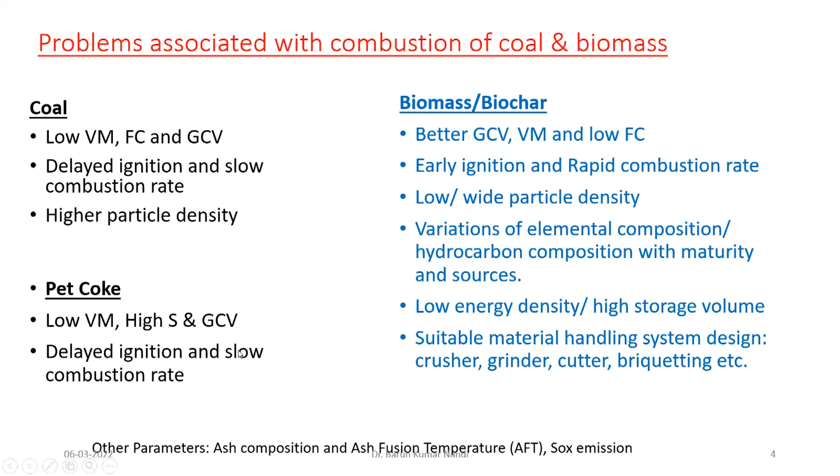So these are three typically different fuels we can blend with coal. Now during blending, we have to consider their different properties. Some of the properties of this fuel are additive in nature - that's like you can add them. It's like fuel A having one GCV, fuel B having a different GCV. By simple calculation, we can estimate their average GCV, average ash, moisture, VM, etc.

So these are the properties we call additive properties. Considering this aspect, we can blend any fuel if we want to only increase the GCV, VM, moisture, etc. So here any blend ratio is accepted for any power plant.

But there are some non-additive properties, where you cannot simply add A plus B. So here you have to see if their individual properties are matching or not. Like ash fusion temperature - if any coal has ash fusion temperature of 1000 degrees, and another coal has ash fusion temperature of 1500 degrees, if we blend them, obviously coal A will fuse first, then coal B will fuse. So here blending will not help. These properties are non-additive.

Similarly, combustion characteristics and burning profiles are also non-additive properties. We cannot simply blindly add them. We have to experimentally verify the combustion characteristics of the blend and individual properties like HGI values, grinding index, abrasion index, ash fusion temperature, caking or non-caking characteristics, etc. We have to ensure individual non-additive properties satisfy the design parameters of any boiler. So here all blends are not permitted, because some properties may match and some may not match.

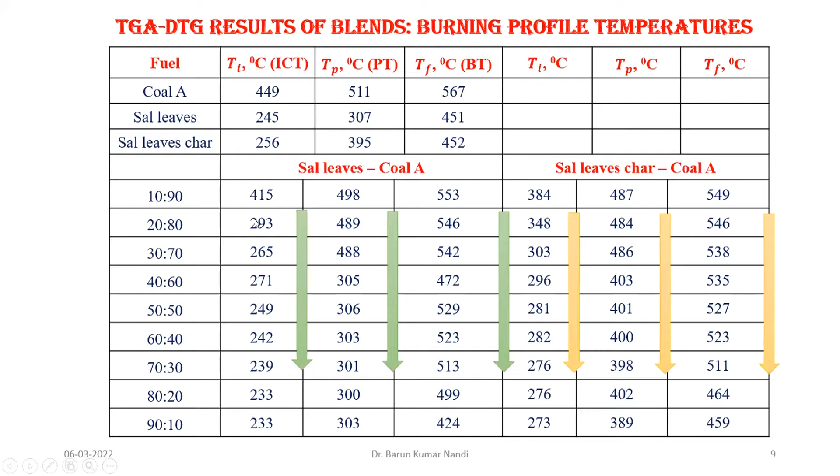So if we see the temperature, ideally if it is designed for coal A, 449. So that blend of 10:90, that is 10% biomass 90% coal, having 415 - so this we can see is nearby, we can use it to some extent. But if you see the other ratios, they are not permissible in the same boiler, because the difference is significantly higher.

So in this way, if we go for other types of agricultural waste - rice straw, wheat straw, mustard husk, wheat husk - they have a GCV in the range of 4,000 to 5,000. And here you have an option for petroleum coke, which we found through our research may be blended with coal in very small quantity because it has an extremely higher GCV.

But the problem is that pet coke has very less ash, but it may have a higher sulfur content. So we can see they have individually distinct combustion profiles - that is the TGA profile also. So in the blend also we can see how they are varying.

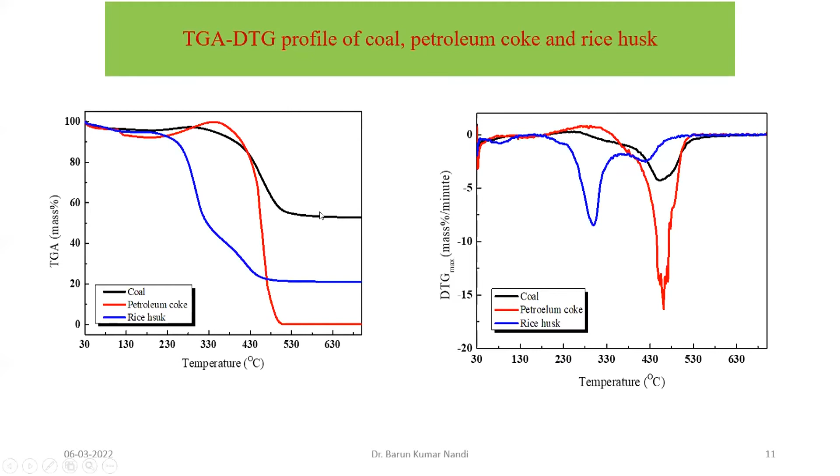So what we suggest is that we can blend a limited quantity of pet coke and biomass, maybe 5%, 10% in this range, by matching this burning profile temperature of 384 with nearby values like 356. So if we go for less pollution, we can make it 90:5:5 or like 92:3:5 in this ratio, so that these temperatures are very much similar.

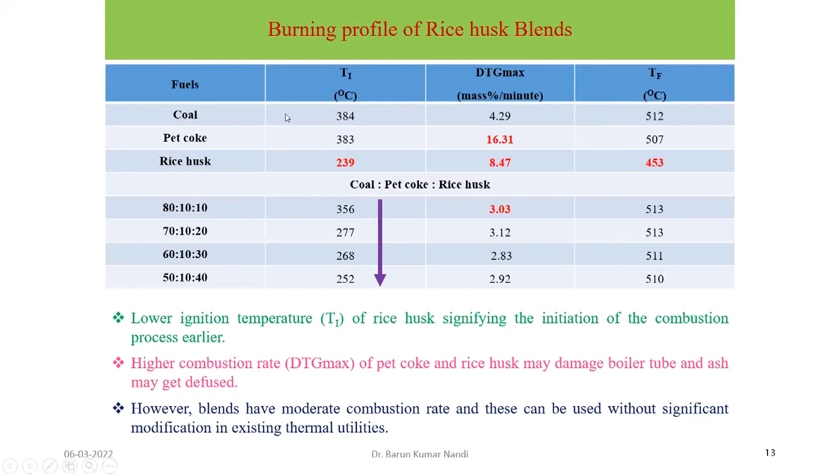So as concluding remarks, coal with similar burning profiles is expected to behave similarly in a full-scale boiler. Burning of high ash, low VM coal is very time consuming because it has an ignition problem. By comparing the burning profile parameters, we can identify which coal-biomass blend ratio or coal-biomass-pet coke ratio can be matched with the design coal. So compatibility may be judged, and the optimum blend ratio needs to be determined and maintained during blending, based mostly on non-additive properties like ash fusion temperature, burning profile, etc.

In the Indian context, biomass has higher GCV, above 4,000 to 5,000 kilocalorie per kg, compared to the high ash coal typically present at power plants now. Maximum 10 to 15% biomass may be blended or co-fired with coal. Biomass helps the combustion performance of high ash coal, particularly helping to reduce auxiliary liquid fuel consumption, that is the fuel oil we burn in a power plant. That fuel oil consumption can be reduced by blending some quantity of biomass.

Typically, forest leaves are more matured, so they have higher GCV compared to agricultural biomass. And if we blend biochar, it gives much more stable combustion because it has lower volatile matter. Very small quantities of pet coke may be blended because it has issues with sulfur content -- we can use a small quantity just to adjust the GCV or energy content of that blend.

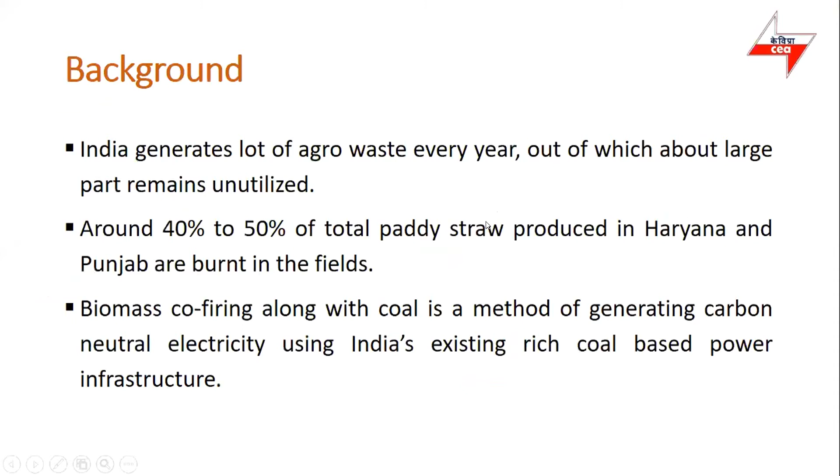Thank you sir. Respected all dignitaries, hope I am audible. Yes, you're audible sir. Okay, so just let me share my presentation. It's all yours. Okay, presentation is visible I think. Hello. Slide is visible, okay.

So the topic of my presentation is policy on biomass utilization for power generation through co-firing in coal-based power plants, just issued by our Ministry of Power.

We see in northwest India only, just 30 to 40 million tons of crop waste from paddy fields is burned after the harvesting season, during winter months of November and December. This 30 to 40 million tons, which is around 40 to 50% of total paddy straw, is in Haryana and Punjab, these northwest states only. This has the potential of around 6,000 to 8,000 megawatts and 45,000 million units of electricity annually, which we can generate from this agro residue that we are just burning in the fields. So it can be utilized.

So it was seen that this biomass co-firing is now a well-proven technology. With increasing environmental awareness, power plants all over the world have adopted biomass co-firing as a strategy to combat pollution.

So if we see just a minute. Okay.

So if you see the total coal consumption as per our executive summary released by Central Electricity Authority in 2019-20, coal consumption is 622 million metric tons in that year. As per the policy issued by Ministry of Power, if we use 5% biomass, that is simply 31 million metric tons. The total surplus biomass in the country is around 228 million metric tons. So there is so much potential for generation of power from this biomass.

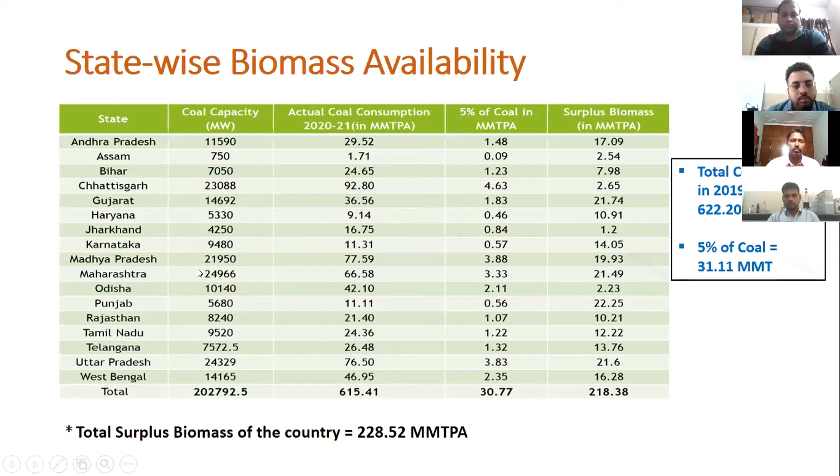The benefits of using biomass pellets co-firing: it eliminates and minimizes the burning of agro residue and creates economic value for agro residue by promoting its use as fuel in power plants. It also improves the air quality index and encourages establishment of decentralized pellet manufacturing. This also means a supply chain will be established, and many jobs will be generated if we promote this policy.

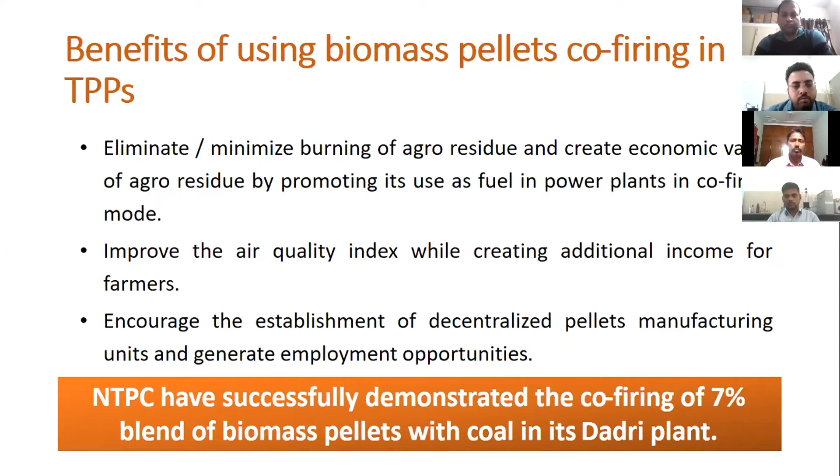CEA was given the responsibility to develop specifications, which were issued, and at that time the policy stated the appropriate commission would determine the compensation to be allowed in tariff. CERC issued accordingly. It was mentioned in the policy that increase in cost of generation will not be taken into account for the purpose of merit order dispatch of electricity.

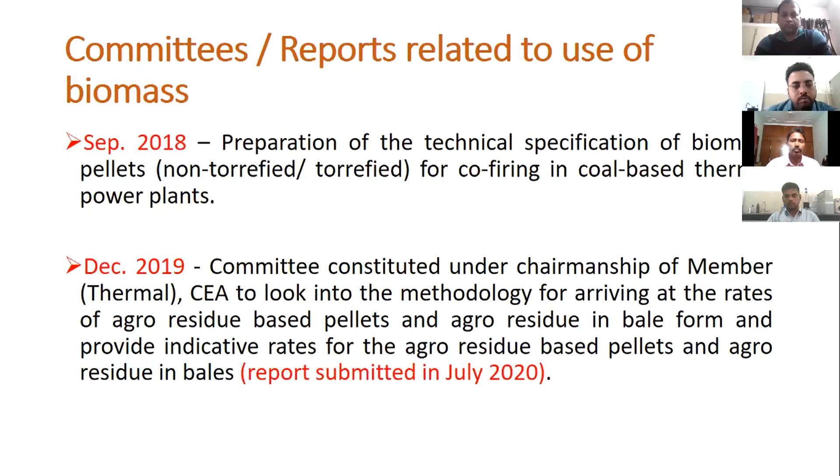Later on, work moved ahead in this direction. Many committees were formed in September 2018. Preparation of technical specifications of biomass pellets for co-firing in coal-based power plants was done by CEA, and it is also available on our website.

In December 2019, a committee was constituted under Member Thermal, CEA, to look into the methodology for arriving at rates of agro-residue. The committee submitted its report in July 2020. Further, in September 2020, a committee was constituted under Additional Secretary, MOP, to look into the supply chain issues.

Now I will let her tell about the biomass mission also. That committee gave its recommendations in November 2020. A committee was constituted under the Chief Engineer of my division, Thermal Engineering and Technology Development, to undertake research into utilization of agro residue in thermal power plants. This committee also submitted its report, and they finalized 13 areas of research, which have been shared with the biomass mission at present.

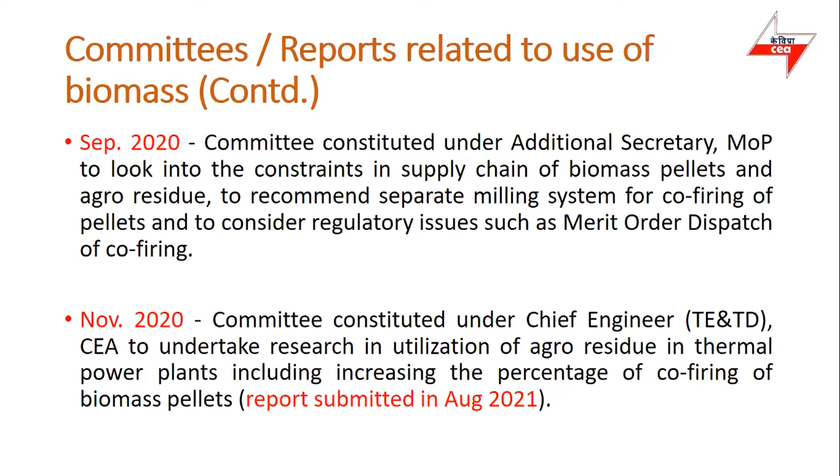Meanwhile, Ministry of New and Renewable Energy issued a notification in September 2019 that power generated from co-firing of biomass in coal-based thermal power plants is renewable energy and is eligible for meeting non-solar renewable purchase obligation.

Then in July 2021, the ministry constituted a biomass mission, and in October 2021 the policy was revised. In the revised policy, biomass co-firing was made mandatory in bowl mills, ball and race mills, and ball and tube mills, and the percentage was also decided.

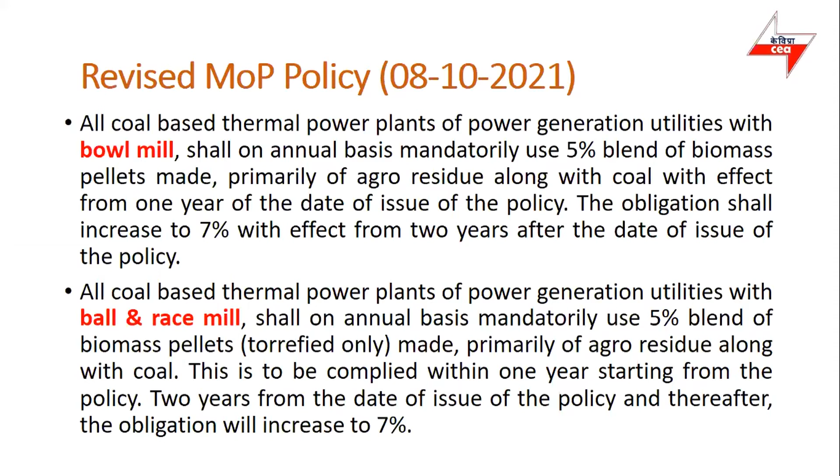All coal-based thermal power plants with bowl mills shall, on annual basis, mandatorily use a 5% blend of biomass pellets in the first year, and the obligation shall increase to 7% with effect from two years after the date of issue of the policy. Similarly, in ball and race mills, torrefied pellets will be used with 5% co-firing in the first year, and 7% from the second year onwards.

For ball and tube mills, torrefied pellets with 5% co-firing, but here, seeing the volatile content because they are prone to fire hazards, volatile content should be below 22% in case of ball and tube mills.

Further, in the policy, generating utilities having certain units under reserve shutdown or not being dispatched due to merit order dispatch consideration would ensure to increase the percentage of co-firing up to 10% in their other operating units.

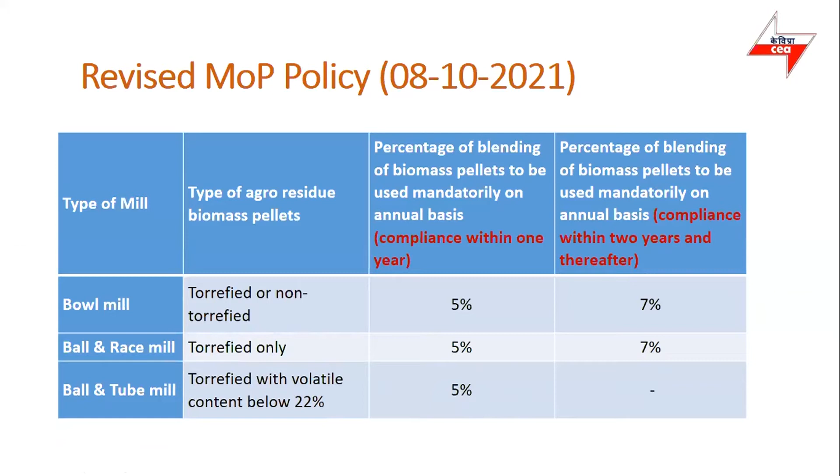This percentage in the various mills is summarized here. In bowl mills, you can see the type of pellets can be torrefied as well as non-torrefied, with first year compliance at 5% and second year at 7%. Ball and race mills use torrefied pellets only, at 5% first year and 7% second year. Ball and tube mills use torrefied pellets with volatile content below 22%, at 5% first year, and research is being done to increase the percentage in these mills. It is also part of policy that the percentage of co-firing will be reviewed from time to time.

An exemption committee has also been formed as per the policy. Any power plant seeking exemption or relaxation from co-firing may be considered on a case-to-case basis based on the recommendations of CEA. The committee is headed by Chief Engineer TETD, with member representatives from NTPC, BHEL, CPRI, Ministry of Agriculture, and the Mission Directorate also.

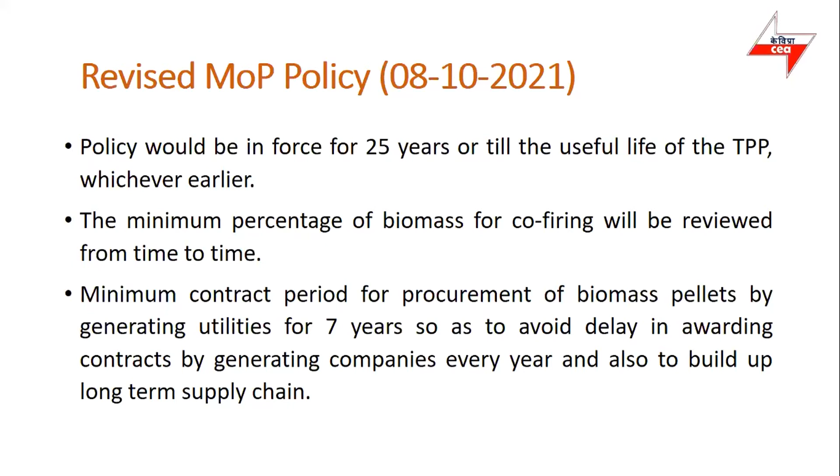The revised policy would be in force for 25 years or till the useful life of the power plant. The minimum percentage of biomass for co-firing will be reviewed time to time, as I earlier told, and there is a minimum contract period to establish the proper supply chain. The minimum contract period for procurement of biomass pellets by generating utilities is 7 years, so as to avoid any delay in awarding contracts by generating companies, and also to build up a long-term supply chain.

Regarding this, provisions are also related to tariff determination and scheduling for projects set up under Section 62 of the Electricity Act. The increase in cost due to co-firing of biomass pellets shall be passed through in energy charge rate. Any new project not covered under Section 62 will be covered under Section 63 under change in law provision. Such additional impact on energy charge rate shall not be considered in deciding merit order dispatch of the power plant. Obligated entities such as DISCOMs can meet their renewable purchase obligations by buying such generation from co-firing.

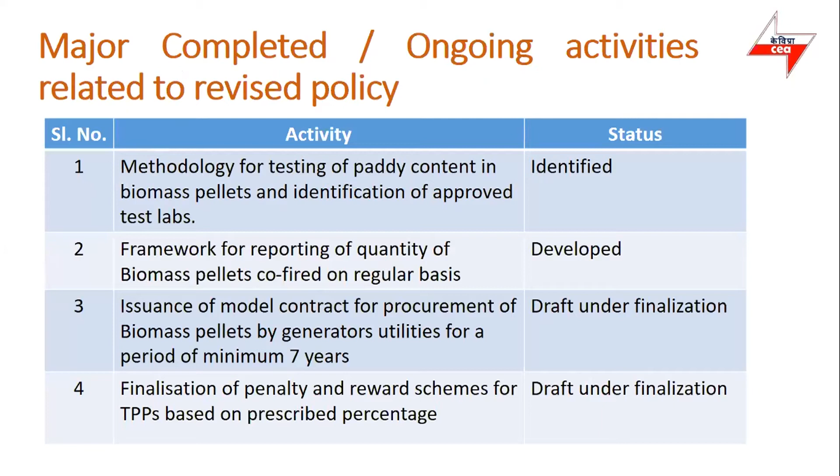Major completed and ongoing activities related to the revised policy: the testing methodology for paddy content in biomass pellets has been identified. A framework for reporting of quantity of biomass pellets has been developed, and the Biomass Mission is collecting data on a daily basis. The model contract is under finalization; it has already been submitted to the ministry, and very soon it will be shared with the utilities. Penalty clause and reward schemes are also under finalization, and very soon these will be shared with the utilities.

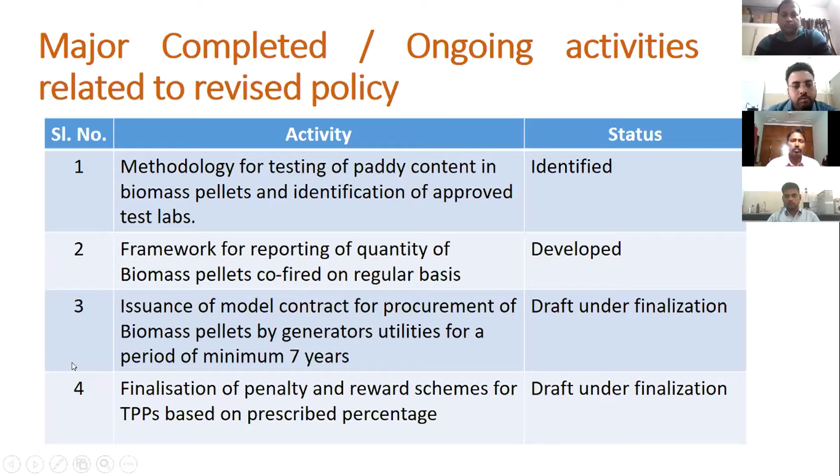So in July, this Biomass Mission was formed. It is a three-tier structure. First is the steering committee headed by Secretary Power, sir. The next level is the executive committee, headed by Member Thermal CEA, and the Mission Directorate headed by Executive Director NTPC. Under the Mission Directorate, we have 5 specialized subgroups which are being given responsibilities in different areas.

Subgroup 1 is headed by Director General CPRI, working on research and development on characteristics of biomass. Subgroup 2 is headed by Director Operations NTPC, working on research and development of boiler design for biomass co-firing and safety aspects.

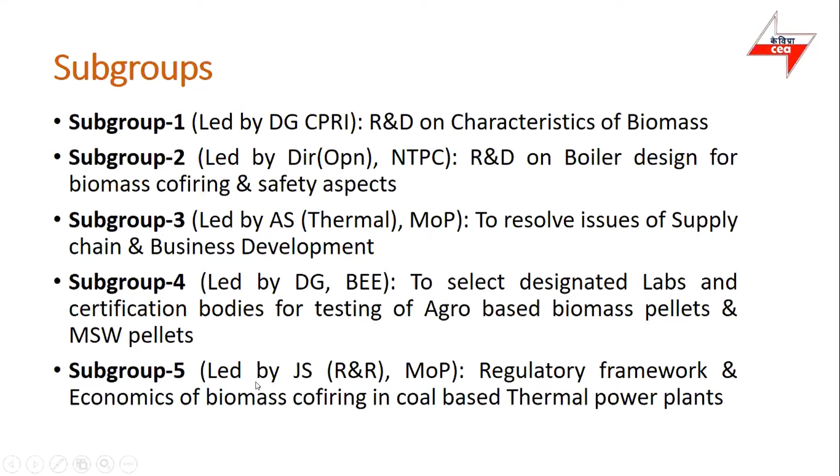Subgroup 3 is headed by Additional Secretary Thermal, Ministry of Power, to look into issues to resolve supply chain related issues and business development. Subgroup 4 is led by Director General BEE, to select designated labs and certification bodies for testing of biomass pellets and municipal solid waste pellets. Subgroup 5 is headed by Joint Secretary R&R, Ministry of Power, to look into regulatory framework and economics of biomass co-firing in coal-based plants.

So this is my small presentation regarding the policy. If you have any questions regarding the policy, just let me know.

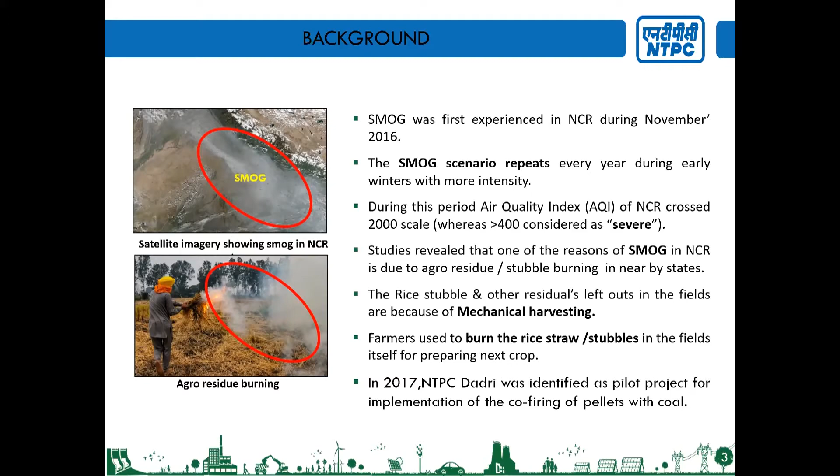For that purpose, NTPC Dadri was identified as the pilot project in 2017. As biomass co-firing was done in India for the first time, there were many apprehensions, because our power plants are designed for 100% coal firing and we do not have infrastructure for biomass co-firing. There were apprehensions whether our milling system and pulverizer system would be able to handle the biomass, whether flame quality would be good, what would be the APH performance, the ESP performance, the efficiency, and the effect on boiler efficiency.

So for that purpose, a team was prepared, consisting of members from CCOS, CC Engineering, and NETRA, which is NTPC's research wing. They did some brainstorming and first decided the specification of pellets to be burned in the power plants. After trial operations, we framed the operational procedure so that 100% safety could be followed while burning biomass.

As a first step, we decided to co-fire 100 metric tons of pellets in Dadri power plant stage 1, unit 4, which is 210 megawatt. First we used 5% biomass and 95% coal, then 7.5%, and finally 10% pellets. When the trial of 10% pellets and 90% coal was successful in one mill, all mills were fed with 10% pellets and 90% coal, and the unit was run at full load. When this trial was successful, we commercialized this biomass operation.

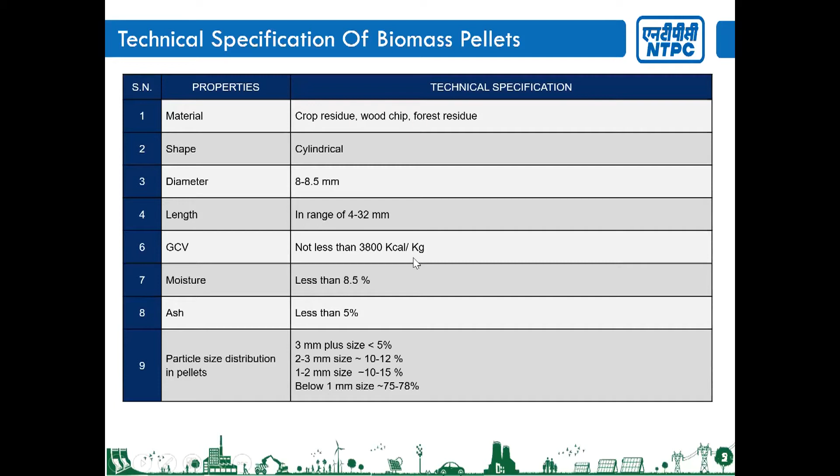We also did some proximate and ultimate analysis of biomass. When using 100% coal, volatile material content is 22%, but in case of 100% biomass, volatile material content is 67% — three times the volatile content of coal. So when using a blend of 90% coal and 10% biomass, volatile material increases, which posed a challenge for us: how to tackle this problem?

We also did some ultimate analysis. Our findings were that nitrogen and sulfur contents are higher in 100% coal compared to 100% biomass. This was good because nitrogen and sulfur content converts into NOx and SOx emissions, so reduced nitrogen and sulfur content means reduced NOx and SOx emissions, which is good for the environment.

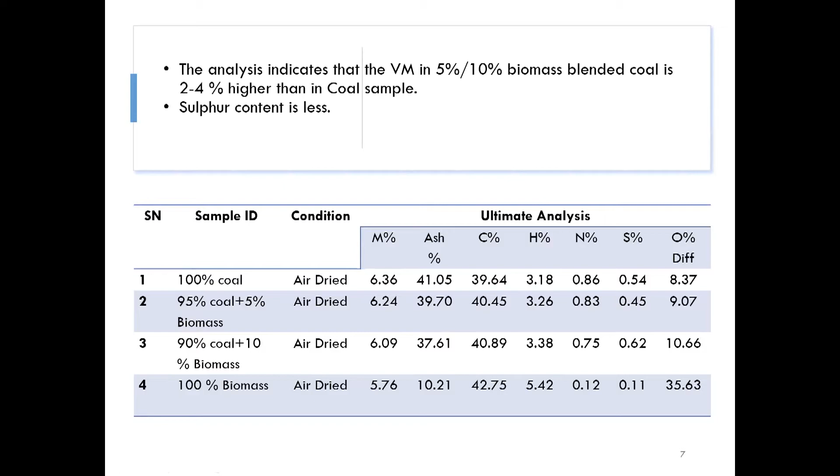We did some combustion analysis, and found that biomass samples start devolatilization — the process where volatile material starts evolving — at 200 degrees centigrade, whereas coal samples start evolving volatile material at 300 degrees centigrade. So there's no problem with coal alone, but when mixing biomass with coal, we cannot go beyond 200 degrees centigrade, because beyond that there are chances of fire. This was the first roadblock in using biomass.

Our overall experience was that we first started firing biomass in September 2017, in 3 phases: first 5% pellet and 95% coal, then 10% pellet and 90% coal. When the trial was successful in 1 mill, all mills were fired with 10% and 90% coal at full load. Based on this experience, on 4th December 2018, we commercialized co-firing of biomass in NTPC Dadri stage 1, comprising 210 megawatts across 4 units.

Later, in stage 2 of Dadri power plant, which has 500 megawatts across 2 units, on 16th January 2020 we achieved commercial biomass operation in the 500 megawatt unit also.

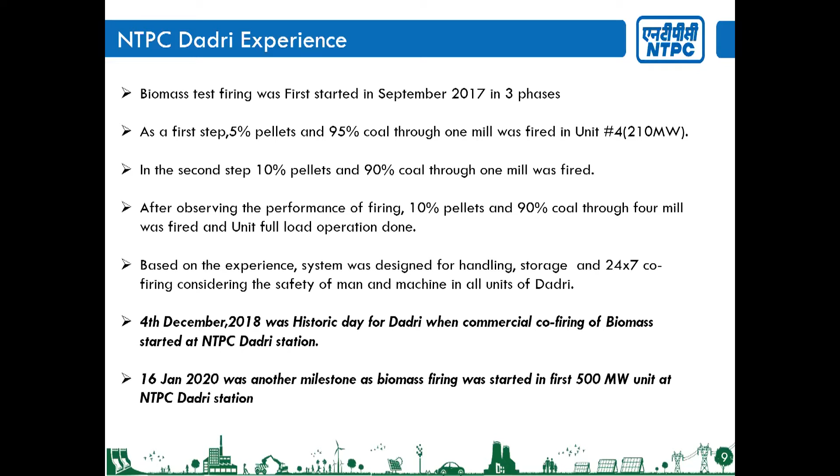As we know, thermal power plants are designed for handling 100% coal capacity, but initially we did not have facilities for handling biomass. So facilities were developed. From the coal handling plant area, when the first biomass pellets arrived, feeding was done through the emergency hopper with the help of a dozer. The rest of the consignment was fed through the emergency feeder in a controlled manner by adjusting the rack and pinion, so that mixing could be done.

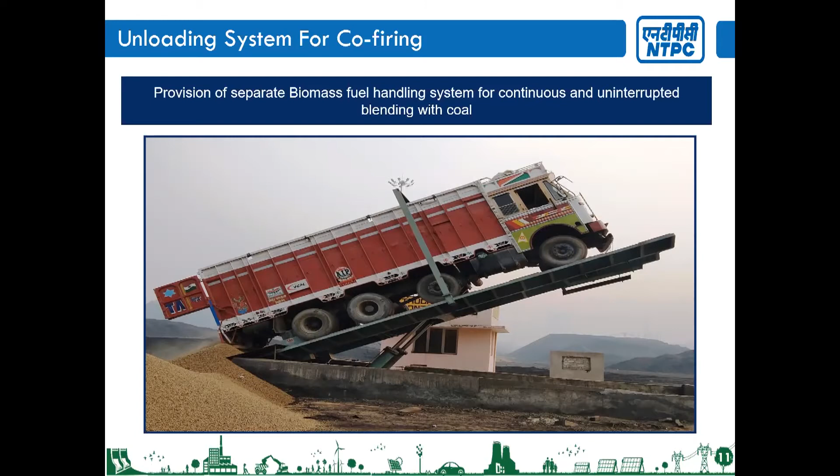As we are dealing with 10% blending of biomass, that means we are handling 10 tons of biomass. We cannot achieve this manually, so we need to automate the system. Initially the system was not available, so we used laborers to empty the biomass.

The blending process: biomass is first collected in the reclaim hopper, and coal is collected in the track hopper. Through conveyors, biomass and coal are sent to the transfer point. There, vibratory feeders mix the coal and biomass uniformly, and from the transfer point, this mixture is fed to all the bunkers of the running units. The bunker is the part of the mill where the fuel is fed.

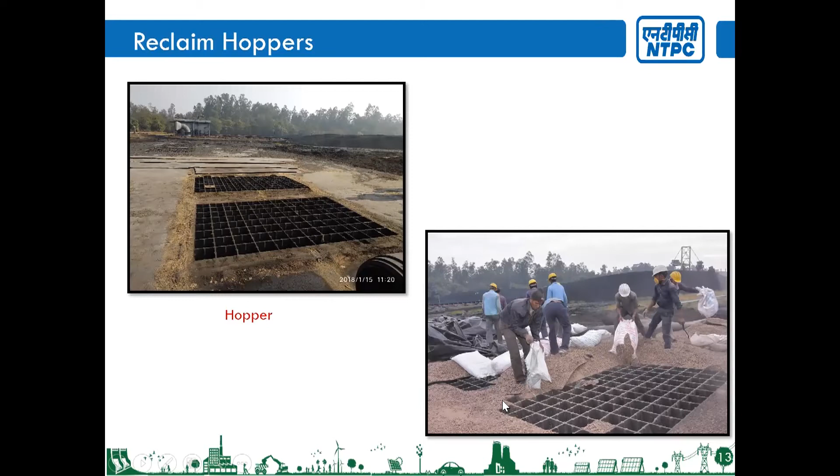These are photos of the reclaim hopper in the coal handling plant area, where we unload the biomass. This is the photo of the initial phase when biomass was unloaded manually. Here are more photos of biomass being handled in the reclaim hopper, and this is after blending of biomass and coal. This is the conveyor belt where biomass and coal are blended and fed from the conveyor to the bunkers of the thermal power plant.

We have fed the coal to the bunkers of the mill, but now we need to burn the coal in the furnace. Some modifications were required, which we learned through trial operation of biomass. Some of the audience may belong to the power plant sector, so they can understand easily, but I will try to explain.

We also use cold air, because if the temperature is very high, we can maintain it using cold air. This system is automated and kept in auto. Normally, when using 100% coal, temperature is controlled using mill outlet temperature, because we do not care much about mill inlet temperature.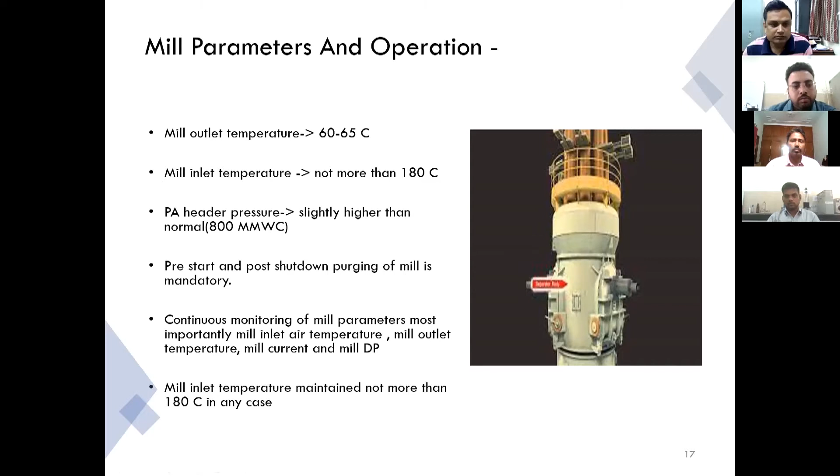Also, purging of the mill is mandatory. Purging is a normal process where we run the mill in unloaded condition to remove any residual fuel from the pulverizer.

When using biomass, continuous monitoring of all parameters is needed, most importantly mill inlet temperature and mill DP, because we are using low mill inlet temperature. Low inlet temperature means there are chances of moisture, so the mill current can increase and mill DP can increase. We need to monitor all these parameters.

Also, the mill reject system should be kept under continuous observation. In case of biomass, the role of the local area operator increases very much, because biomass is being fed into the bunker, and the bunker height is around 20 to 25 meters, so it takes time for the biomass to reach the feeder to the pulverizer.

So the local area operator will see from the feeder view glass whether the biomass is coming or not. When the biomass starts coming, he will inform the control room: sir, biomass has started coming, you can make biomass mode on.

Also, we need to maintain and observe flue gas temperature parameters. Flue gas temperature in the SH zone, APH flue gas outlet temperature. All these parameters need to be maintained.

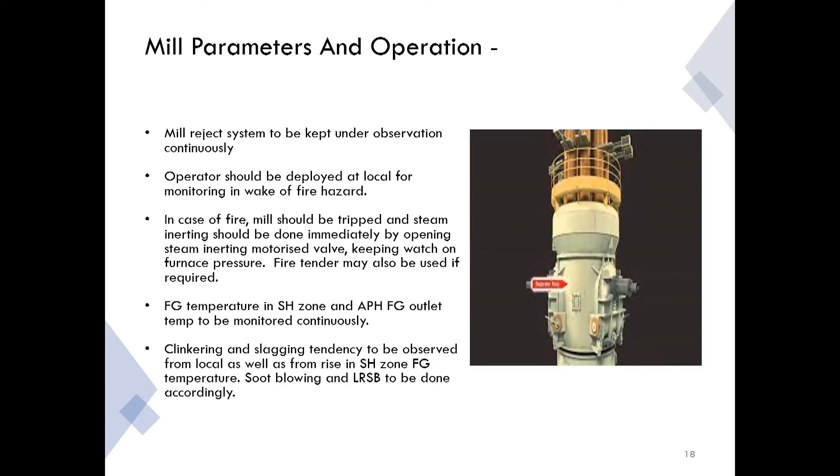Currently, if 100% coal is there, then we run the mill in biomass off mode. But suppose biomass has started coming into the feeder and the operator has informed us, then we need to make biomass mode on. But because we need to reduce the mill inlet temperature, we will first take the system to manual and reduce the mill inlet temperature.

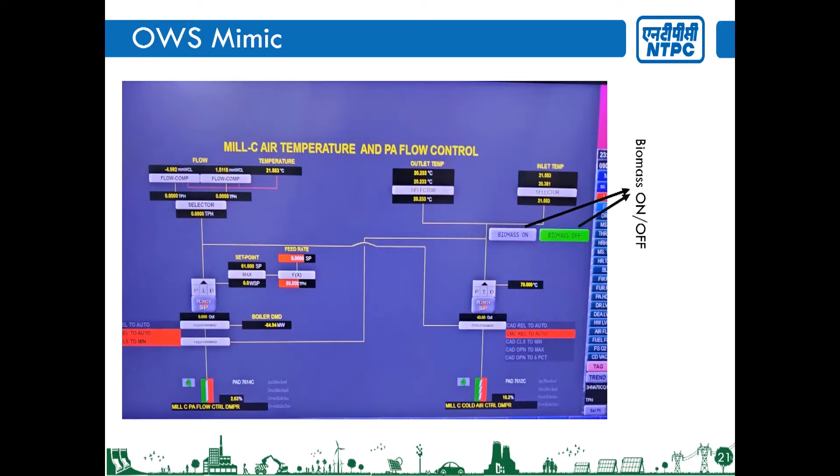This is mill inlet temperature, and when mill inlet temperature comes below 180 degrees, we will make biomass mode on and put the system in auto. When we have put the biomass mode on, it will automatically track the mill inlet temperature instead of mill outlet temperature, and all interlocks, protection and alarms related to biomass will come into action.

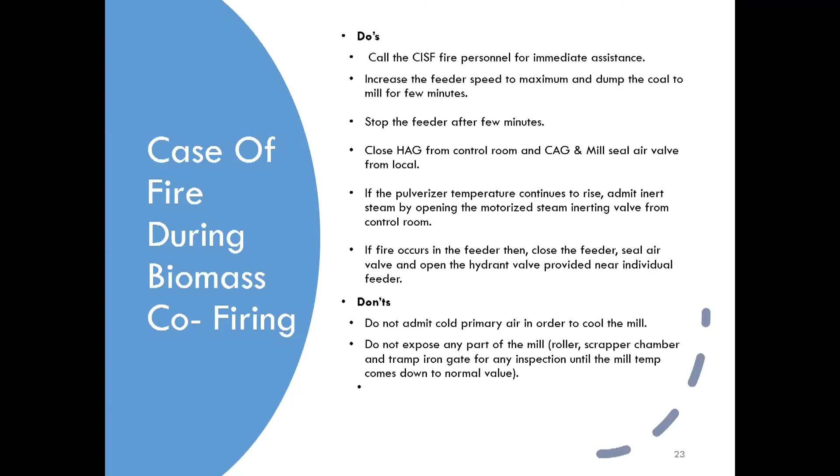In case of any fire during biomass co-firing, since the chances of fire are high, if any parameter reports chances of fire, there is a standard operating procedure for quenching that fire. The only difference is that instead of a manual valve, there is a mill inerting motorized valve for quenching the fire.

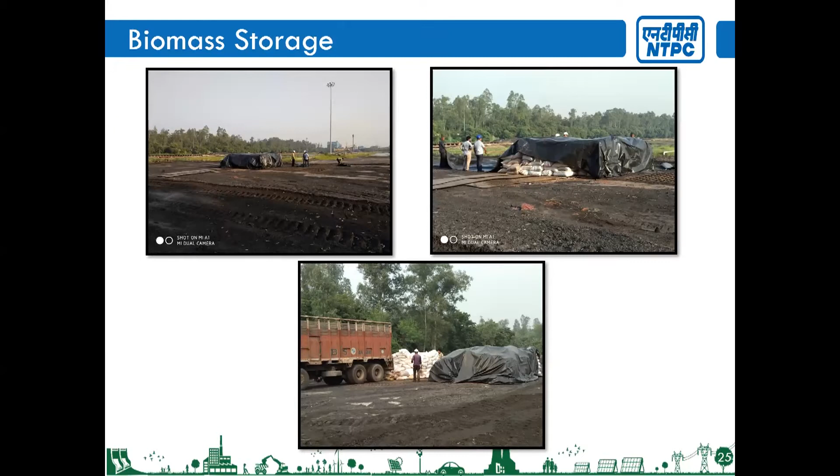The most common problem with biomass is that it absorbs moisture very easily. So we try to use it on the same day whenever it is received. When the biomass is received, we feed it to whichever bunker is empty on the same day, because we have made all our 6 units capable of biomass co-firing.

So this is the storage system for now, showing how we are storing the biomass.

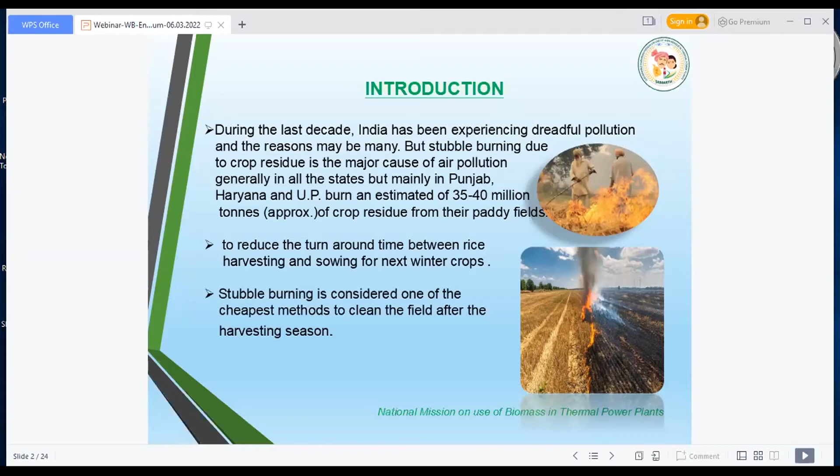As is known, stubble burning is one of the contributors to atmospheric pollution. It releases toxic pollutants and harmful gases like carbon monoxide, methane, and volatile organic compounds. These pollutants and particulates, generally PM2.5 and PM10, not only affect air quality but also degrade human health. Moreover, the heat generated penetrates into the soil causing erosion, resulting in loss of useful microbes and bacteria that are beneficial to the soil, which affects soil fertility.

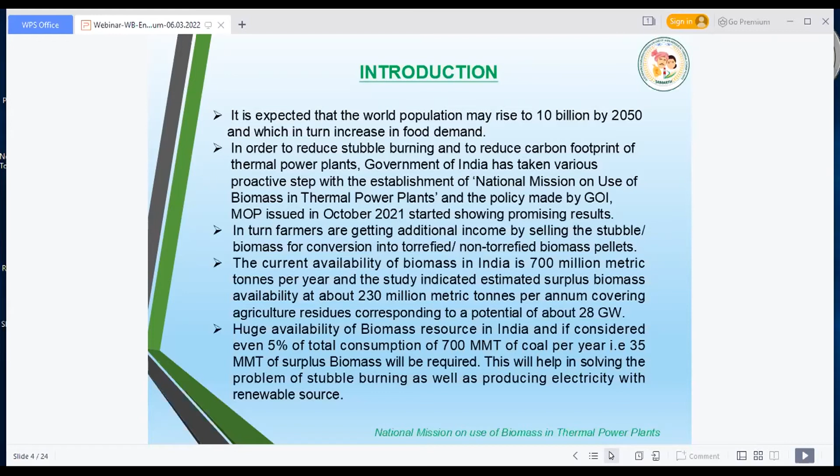The Ministry of Power has set up a mission with a three-tier structure, consisting of a steering committee headed by the Secretary of Power, an executive committee headed by Member Thermal, CEA, and a mission director headed by the Executive Director, NTPC. There are 5 specialized subgroups: Subgroup 1, headed by DGCPRI, working on research and properties of biomass; Subgroup 2, headed by NTPC, looking at technical specifications and safety aspects; Subgroup 3, headed by MOP, looking after supply chain, logistics and business development; Subgroup 4, headed by BEE, involved in preparation of standards, certification and identification of labs; and Subgroup 5, again headed by MOP, looking after the regulatory framework of biomass co-firing.

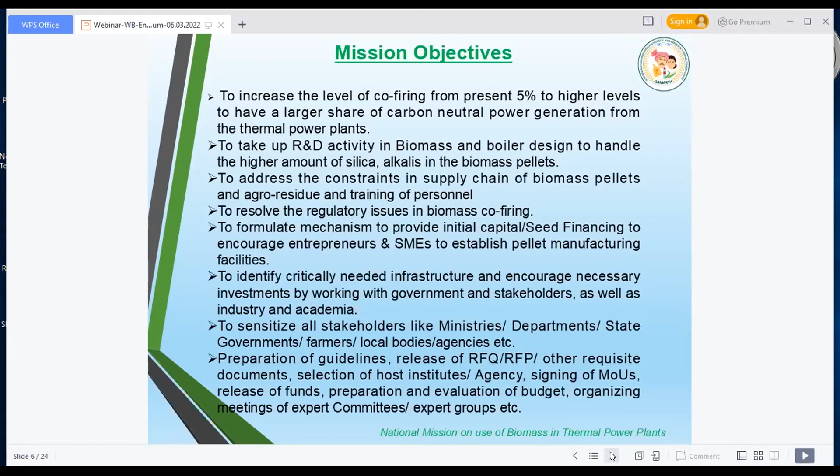So there are revised policies which have been issued on 8th of October 2021, which mandate that in bowl mills there should be a 5% blend of biomass with effect from 1 year, then 7% biomass co-firing with effect from 2 years from the date of issue of guidelines. For ball and race mills, again 5% blend for torrefied only with effect from 1 year from the date of issue, and 7% after 2 years. In ball and tube mills, 5% blend of torrefied pellets with volatile content below 22%, considering safety aspects.

And if there are certain units or generating utilities which are under reserve shutdown and not being dispatched due to merit order dispatch, there is a consideration of percentage of co-firing up to 10% in their operating units.

These complying policies also apply if any power plants are seeking exemption or relaxation. MOP has formed a committee based on recommendations, which will decide based on recommendations of CEA, headed by a committee of CEA, TE&TD, which will be headed by CE of CEA and include other representatives of NTPC, BHEL, CPRI, Ministry of Agriculture, and Mission Directorate.

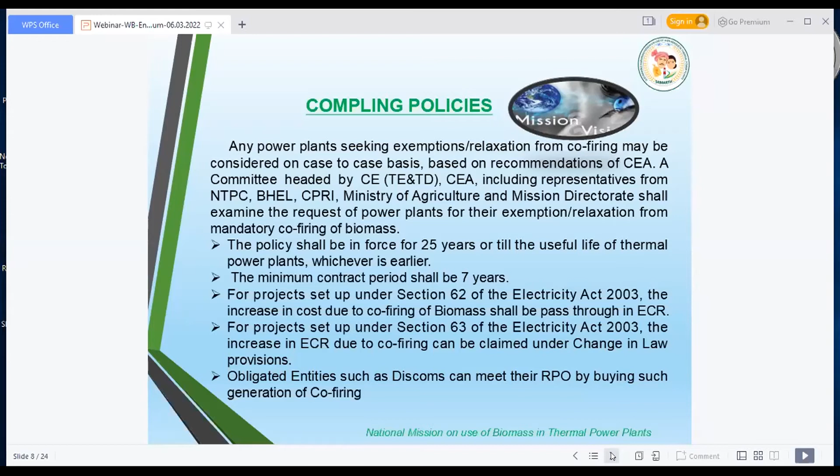These policies will contribute to the National Clean Air Program and further support the energy transition in the country, fulfilling targets to move towards cleaner energy sources and helping reduce carbon footprints of coal-fired thermal power plants. This methodology is also applicable for captive power plants using co-firing of biomass.

As explained previously, there is a lot of market potential for the usage of biomass, because the quantum of biomass resource available in India is sufficient to take up these policy guidelines of 5%, 7%, 7%, and 10%, which will be reviewed from time to time by increasing the thermal share in biomass. Presently, availability of biomass in India is around 700 to 750 million metric tons, and the surplus is 230 million tons, which has a potential of 28 gigawatts.

NTPC has executed a tender to procure 20 million tons of biomass, which will enable the firm to co-fire pellets at its power plants, and this is in process. Not only power plants, other industries like cement, FMCG, pharmaceuticals, etc., also need to consume this biomass to meet their individual emission goals, because this is a collective responsibility of all stakeholders to reduce greenhouse gases and contribute to clean air.

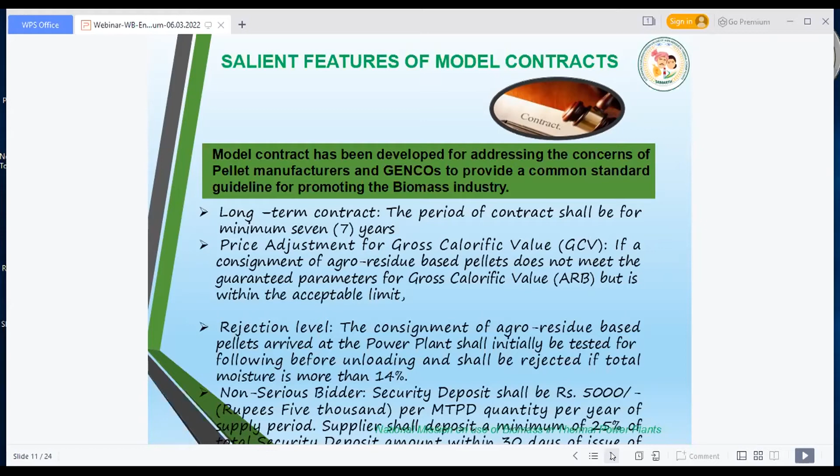There is a rejection level if moisture is more than 14%, and if any non-serious bidders are there, they have to deposit a security deposit as per the guidelines, which is a minimum of 25% of the total security deposit.

And of course, there is a price variation clause if the supply is not to the actual destination or elsewhere due to certain reasons. The price variation clause depends on labor, diesel, and electricity usage.

The mission has also identified technical specifications for agro-residue based pellets, in terms of bulk density, moisture content, and GCV.

Is it audible? Excuse me. Yes sir, yes sir, it's audible, it's audible.

So the contracts will have certain periods and delivery schedules, and these are going to be issued shortly, which will also create additional income for our farmers.

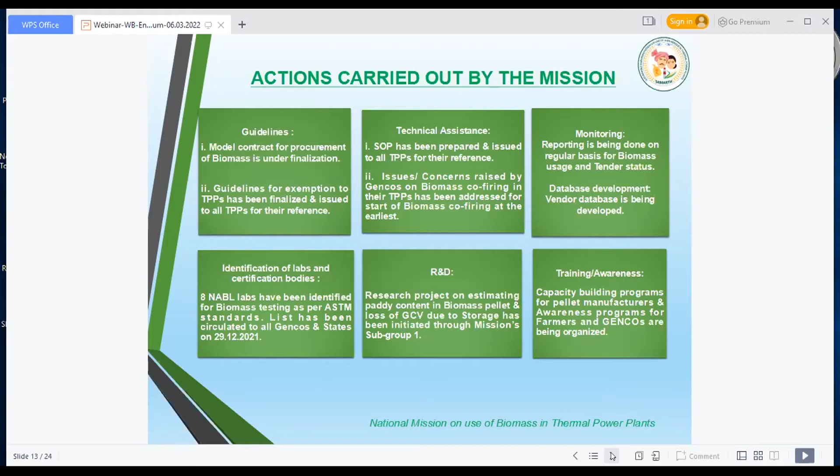Now, action carried out by the mission. Apart from being a mission that is actually working within a short period of time, it has done a lot of good things, and these need to be spread and implemented across pan India. So the basic things we have done are: we have made a model contract for procurement of biomass, which is under finalization stage, and we have also made provisions for exemption guidelines, which are being handled under the head of CEA.

Technical assistance is also being given, and SOPs have been prepared and issued to all TPPs for their reference, and issues and concerns raised by GenCos on biomass co-firing have been addressed. Day-to-day monitoring is being done regularly for biomass usage, and a vendor database is being developed. 8 NABL labs have already been identified and the list has been circulated. Apart from IS standards, which are presently not available exclusively for biomass usage and testing, that is also being taken care of by one of our subgroups.

R&D activities are addressing the long storage of biomass, specifically how the loss of GCV affects efficiency during firing, since harvesting occurs only between 2 to 3 months. So if biomass needs to be used over a longer continuous period, what will be the effect on GCV with longer storage duration? That has also been taken care of by one of our subgroups.

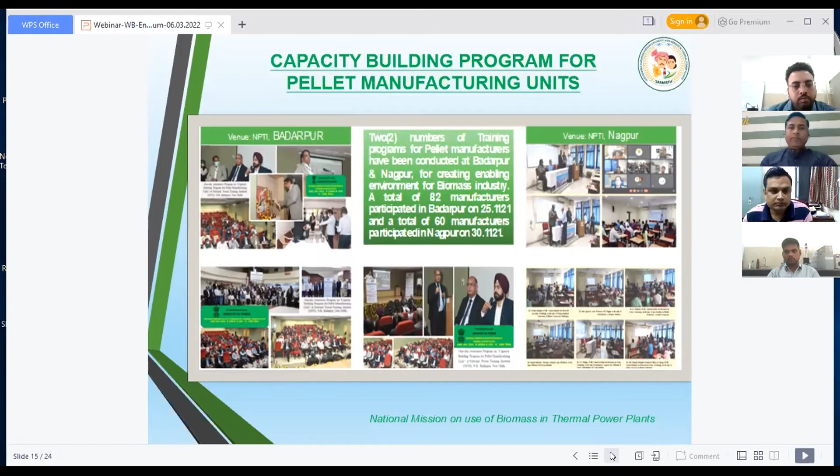Now, this is the progress in co-firing of biomass in TPPs. There is already usage of biomass in TPPs. This data is up to the last month, up to 22nd of February.

Tenders have also been implemented in the NCR region of NTPC power plants. The tender has been awarded, and is under award and under tendering stage, for a total of 40,93,200 metric tons. In other power plants, it is 2,22,800 metric tons. In other regions of NTPC, it is 65,55,800 metric tons. In other organization power plants, it is 35,69,785 metric tons.

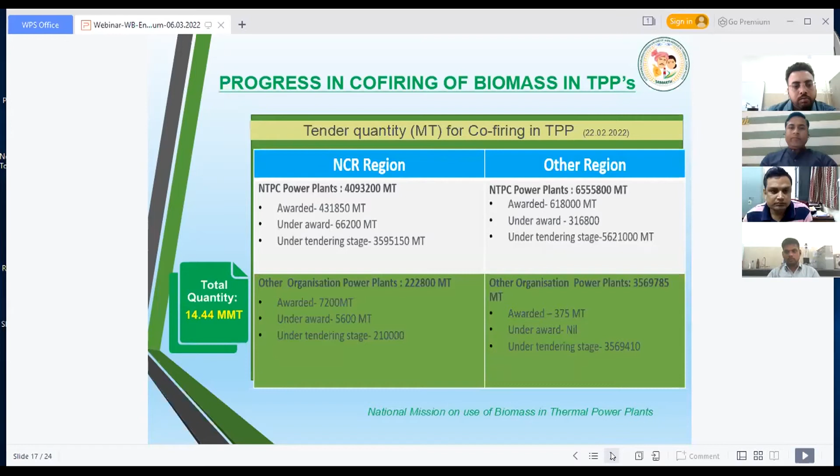In addition to this, the national mission has a separate website which will be launched very shortly under the name of SAMARTH - Sustainable Agrarian Mission on Agro Residue use in Thermal power plants. This platform will give an interaction space for all stakeholders - farmers, pellet manufacturers, and GENCOs. It has a lot of user interface features on how to use this biomass, which will be facilitated through this platform.

There are also salient features for our GENCOs. A vendor database has been created and is being updated regularly for GENCOs, which can be accessed on the mission website. Another salient feature will be shown in the next slide.

The following features will be enabled for nodal officers for biomass reporting, since day-to-day reporting on biomass usage in power plants is being taken care of. This includes tender detail management, actual consumption management, consumption forecast management, and pellet costing management under the management information system - actual consumption report, tender detail report, costing report, and forecast report. Everything will be available, and proper addressing will be taken care of for all stakeholders.

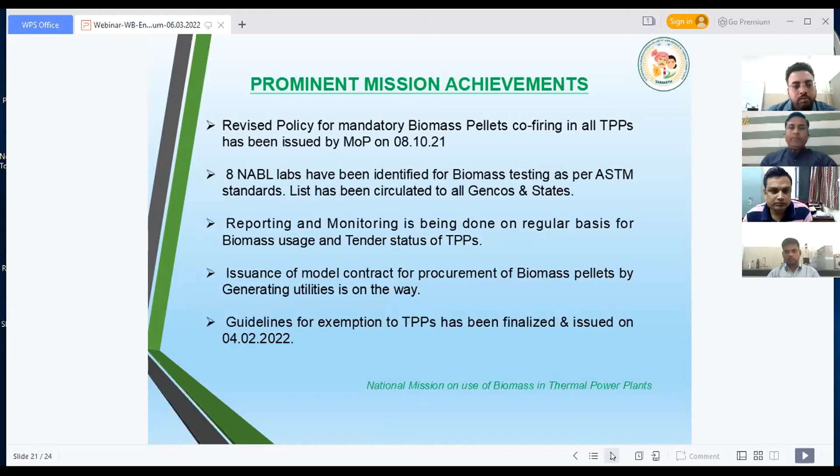A vendor database has been developed for facilitating the biomass supply chain, and a framework for online updation, reporting, and monitoring has been developed through this mission website. Loss of GCV due to storage is being taken care of in our R&D activities, and various farmer awareness programs and training activities for pellet manufacturers and GENCOs are going on. To spread and implement this across pan-India, newspaper advertisements and hoardings in different states have been undertaken by our mission, and it is ongoing.

Now, what is the future roadmap? Currently power plants are using 5-7% biomass, and after due revision, it may increase to 10% or so. So there will definitely be a requirement for technological firing methods like direct firing, parallel firing, and indirect firing. Presently, direct firing is going on.

So how to proceed if the thermal share increases, and what changes are needed in the design of the boiler and so on - this is a matter of concern that has to be addressed when the thermal share increases. Not only that, how to use torrefied biomass in co-firing, and how torrefaction technology has to be implemented and used at mass scale - that is also to be addressed in future.

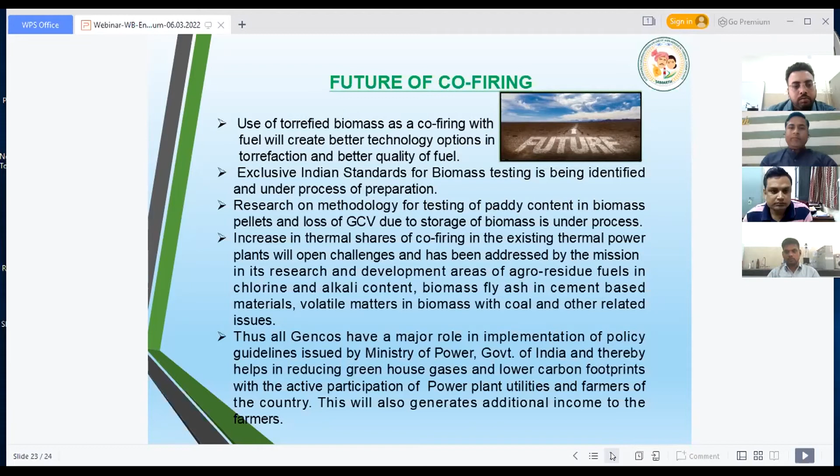By utilizing and implementing these policies properly, we will definitely contribute to the clean air program, and ultimately try to reduce greenhouse gas emissions and neutralize or reduce the carbon footprints of thermal power plants. Next slide - so this is up to this point.

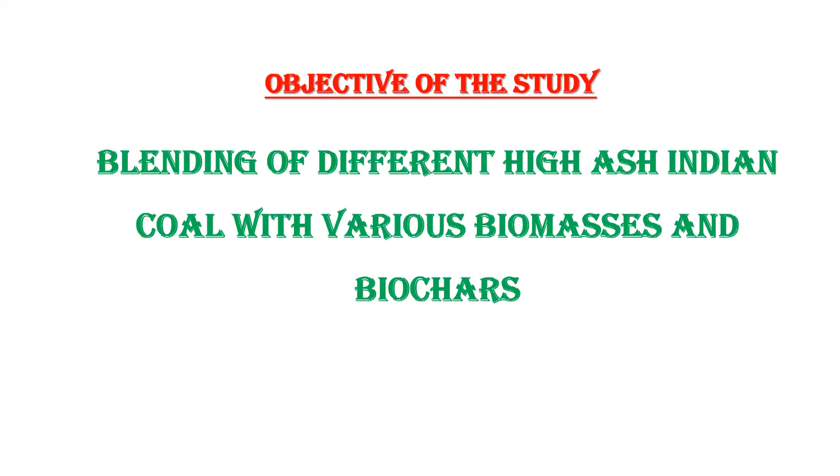Sink float test is a test to separate coal based on their specific gravity in a heavy liquid medium. Similarly, biomass was collected, around 22 to 25 kg of various mature tree leaves such as sal leaves, eucalyptus leaves, segun leaves, and rice straw from different forest sources and rice mills located in West Bengal and Jharkhand, India. After collecting, the biomass material was sorted to remove foreign materials such as dust and rock particles associated with the leaves.

Then it is washed in tap water and dried at 60 degrees centigrade for 24 hours in an air oven to remove the surface moisture. Subsequently, the leaves were shredded and ground to minus 212 micron size or minus 72 mesh size in a laboratory mixer grinder to prepare a biomass powder prior to the combustion experiment.

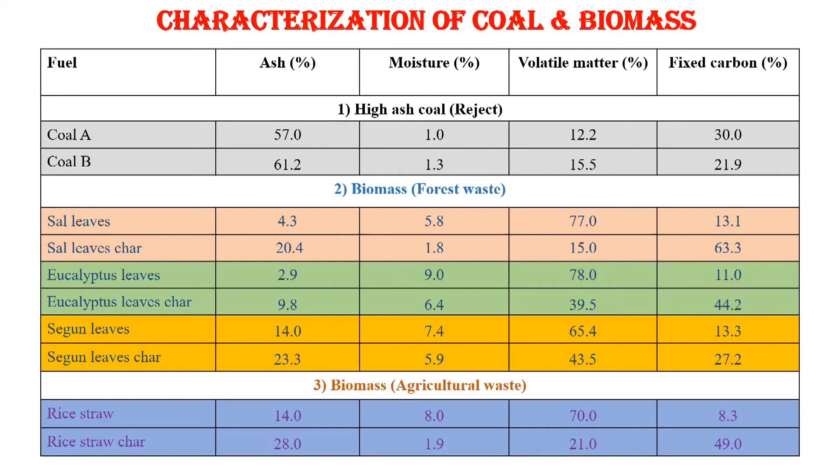Whereas for sal leaves char, the GCV is comparatively lower. Lower value of GCV in biochar is due to removal of volatile matter content and carbonaceous hydrocarbon during low temperature carbonization process.

Similarly, for the blend case, we see that as sal leaves is blended with coal in different ratios, the GCV of the blend increases, as GCV is an additive property, as mentioned by Sir. So we can see that considering the design criteria of boiler in thermal power plants for good combustion process, a GCV of 4000 is considered an optimum GCV. So here we can see that addition of 20% of sal leaves to coal reaches the GCV at 4250, which is quite similar to the design criteria of the boiler.

Similarly, for sal leaves char, we can see that the GCV of 4000 is reached when sal leaves char is added in the blend by 50%. Similar results are also observed for eucalyptus leaves and eucalyptus leaves char. So overall, we can conclude from the slide that optimum blending percentage for biomass is around 20%, and for biochars it is around 50%.

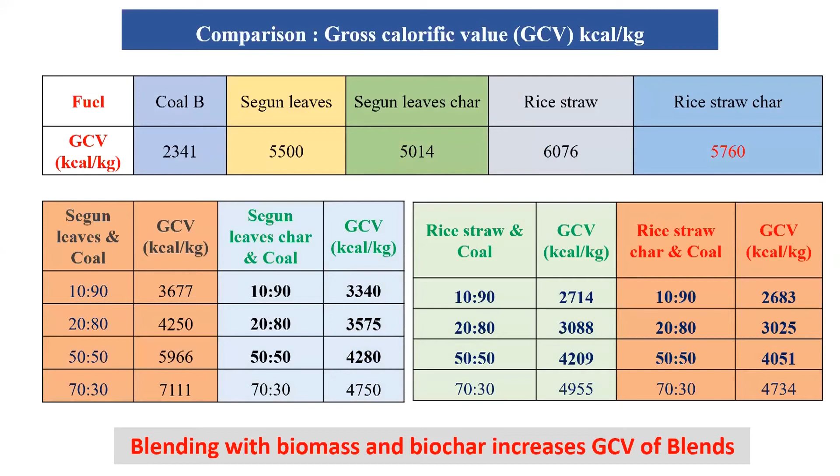This is the burning profile temperature obtained for blend of coal B with rice straw. You can see there are three burning profile temperatures: ignition temperature, peak temperature, and burnout temperature. For coal B, these temperatures are quite high as compared to rice straw.

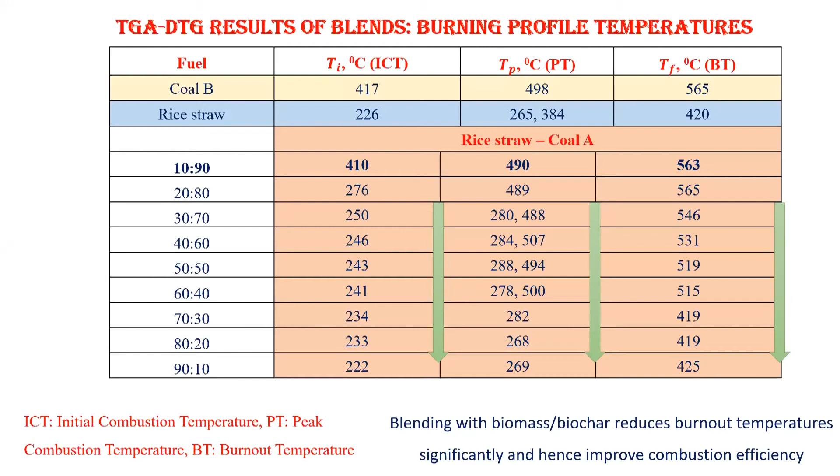When we blend rice straw with coal B, the ignition temperature reduces initially from 417 to 410 degrees. With further addition of 20% biomass in the blend, there is a huge decrease in ignition temperature. Therefore, considering the boiler design criteria, which should match similar to the burning temperature of coal, 10% addition of rice straw can be considered as an optimum blend ratio. Such reduction in ignition temperature can be ascribed to the presence of high volatile organic matter present in biomass and biochar materials.

Moving on to the next slide. Combustion efficiency plays a very important role in efficient utilization of biomass coal and biochar coal blend in thermal utilities. Figure A shows the blend of coal A with sal leaves and sal leaves char. We see that when only coal is burnt, combustion percentage is very near to zero.

As we add sal leaves by 10%, combustion percentage improves to around 30%. This area is indicated by a green circle. Keeping the design criteria of the boiler in mind, up to 10 to 15% addition of biomass and biochar can be easily mixed with coal, where the deviation compared to coal may be negligible. But if blended with a higher percentage of biomass, significant improvement is observed, though that may not be the possible design criteria.

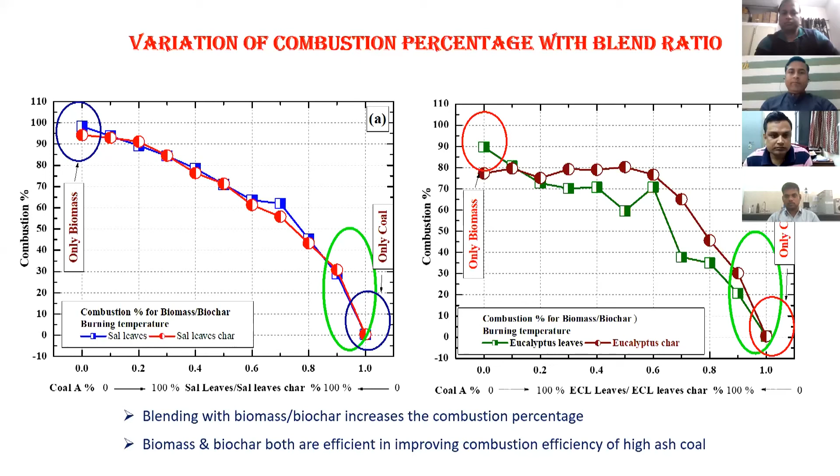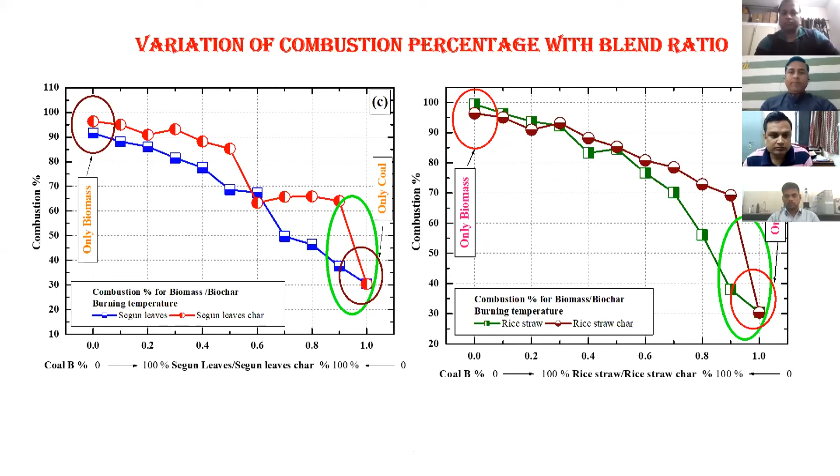Similar observations are noted for eucalyptus leaves and eucalyptus leaves char. Overall, blending with biomass biochar increases the combustion percentage of coal. Here is a similar set of results again, but for a different biomass with a slight variation, so I won't go further into the detail. Moving to the next slide.

This is the summary. We can conclude that GCV obtained for different biomass is above 5,500 kilocalorie per kg, whereas for biochar it is comparatively lower. This is due to release of volatile matter and carbonaceous content during the low temperature carbonization process. Combustion percentage improves with addition of biomass and biochar.

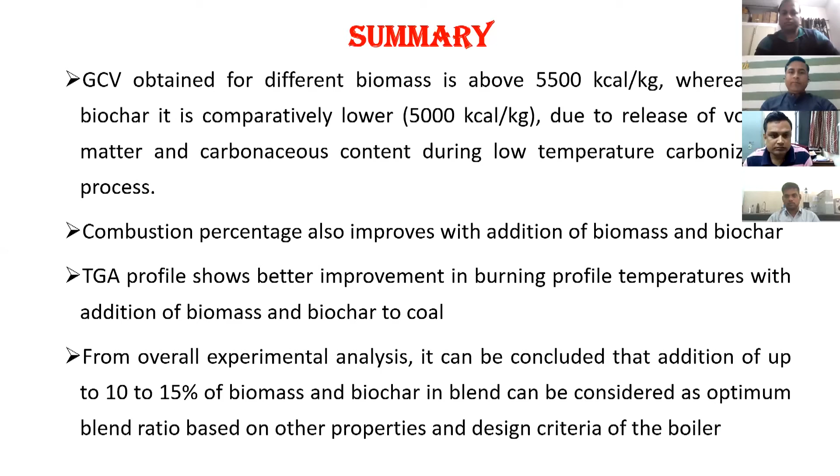TGA profile shows better improvement in burning profile temperatures with addition of biomass and biochar to coal. From overall experimental analysis, it can be concluded that addition of up to 10 to 15% of biomass and biochar in the blend can be considered as an optimum blend ratio based on other properties and design criteria of the boiler.

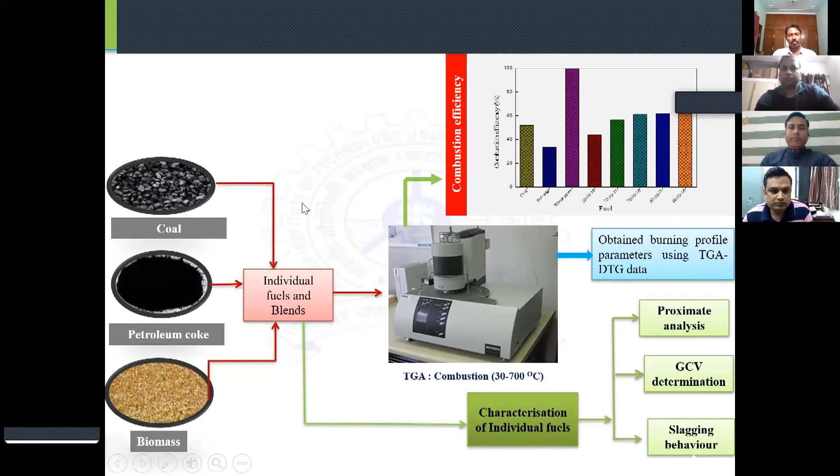This is the experimental flow sheet. Coal, petroleum coke, and biomass samples were collected, and after collection, samples were prepared into the required size. Combustion experiments were then done using TGA. After TGA, burning profiles and combustion efficiency profiles were obtained. Individual fuels were characterized using proximate analysis, GCV determination, and XRF analysis.

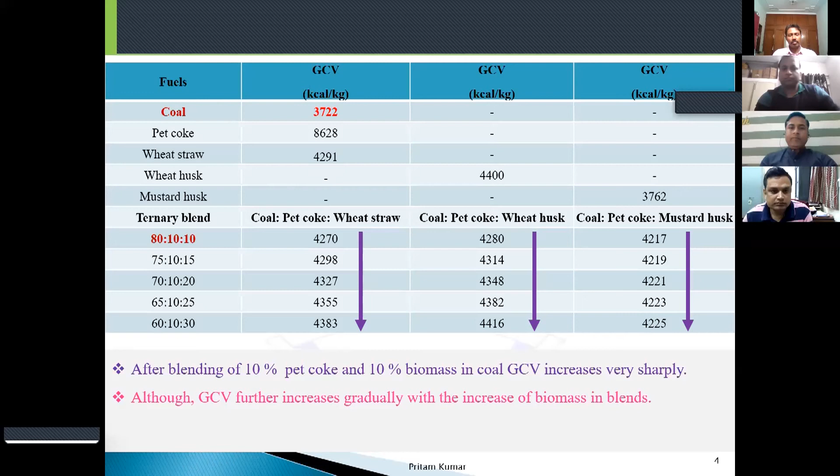This is the GCV comparison table. From the table, we can see that after addition of 10% petroleum coke and 10% wheat straw, GCV increased from 3722 to 4270. But further increase in wheat straw does not increase GCV so much. Similar observations were seen for wheat husk and mustard husk blends.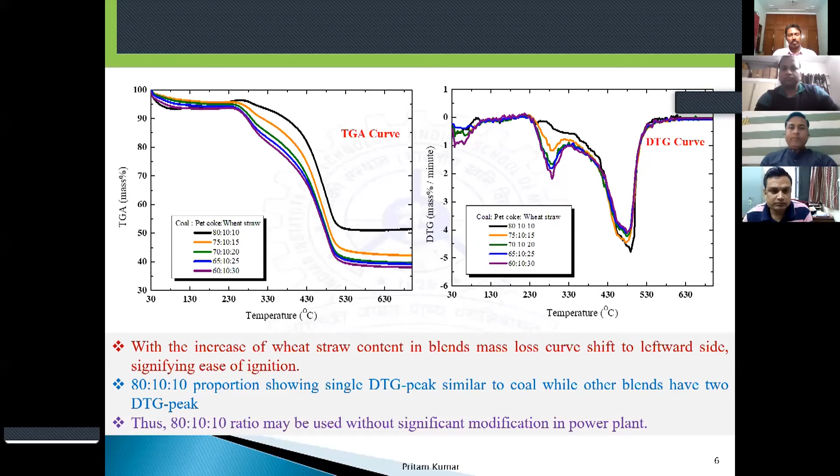From TGA DTG analysis, we obtained burning profiles. From burning profile characteristics, we can see that wheat straw has lower ignition temperature and lower burnout temperature. However, pet coke and wheat straw have higher combustion rate. Higher combustion rate may damage boiler tubes due to diffusion of ash.

With increase in wheat straw content in the blend, ignition temperature reduces, and DTG max increases for the first peak and decreases for the second peak. However, insignificant variation occurs in burnout temperature. Overall, from this analysis, we can say that the 80-10-10 ratio may be used in power plants because its burning profile is almost similar to coal.

This is the combustion efficiency profile of rice husk and wheat straw blends, obtained at 450 degrees Celsius. From the graph, we can see that rice husk has higher combustion efficiency compared to coal and petroleum coke, while petroleum coke has lower combustion efficiency. With addition of rice husk blends, combustion efficiency increases from 52% to 62%, and for wheat straw, combustion efficiency improves from 51% to 63%.

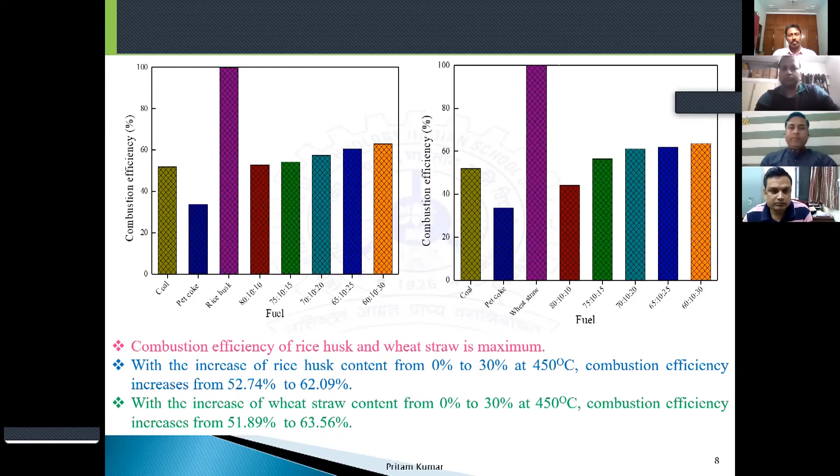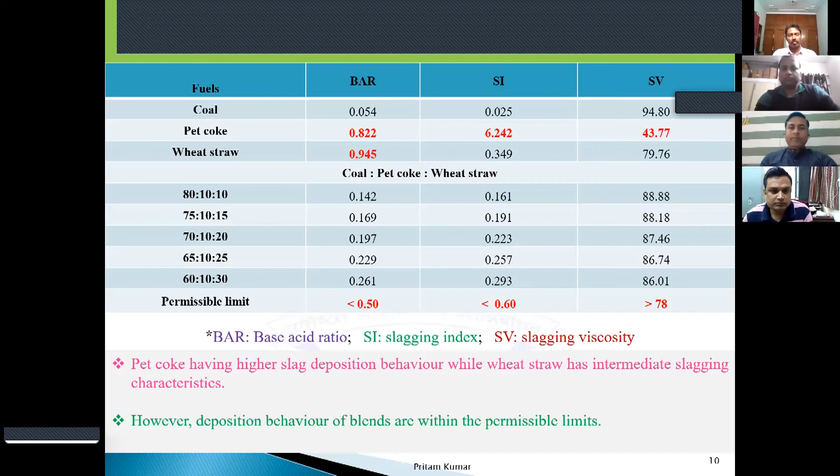This is the deposition behavior of coal, petroleum coke, wheat straw and their blends. From the table, we can see that deposition behavior of petroleum coke is very high compared to the permissible limit. However, for wheat straw, deposition behavior is intermediate, and for blends, it is within the permissible limit.

Overall, we can say that petroleum coke has very high energy density compared to coal and biomass. However, biomass has higher volatile matter and acceptable slagging behavior. Analysis of burning profiles shows that addition of biomass improved ignition property, and combustion efficiency also increased due to volatile matter and hydrogen in the blends.

Results obtained from GCV, slagging characteristics, sulfur emission, and burning profile show that an 80-10-10 ratio of coal, pet coke, and biomass may be used in thermal power plants. Overall, the current work shows that addition of pet coke with coal helps improve GCV value, while blending biomass improves the slagging, ignition, and combustion behavior of blends. Thank you.

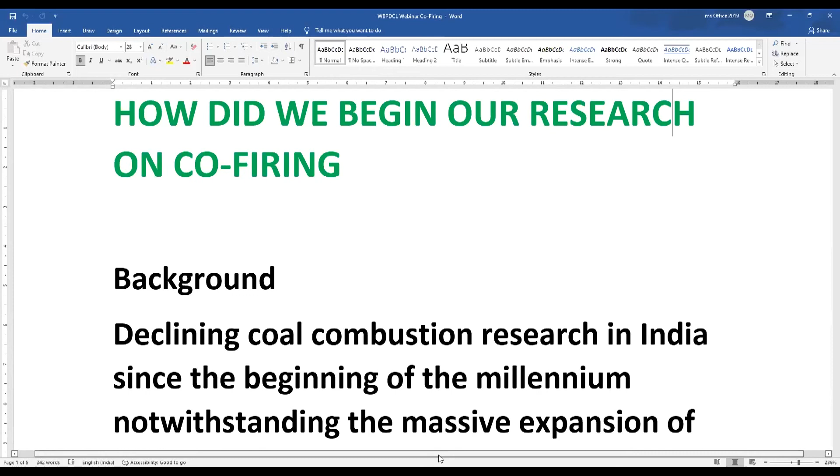A little bit of background. Since the beginning of this millennium, across research laboratories and universities, combustion research had been declining steadily, notwithstanding the massive expansion of coal-fired power plants in India, as if all our combustion issues have been sorted out and everything is fine, with no difficulty in any power plants.

Given the high ash content and low to moderate GCV of our coal, there are hardly a few plants which get coal from one particular source. Essentially, it is multiple sources linked to the plant, and that linkage is not forever, it changes. Naturally, all these issues are bound to bring up combustion related issues - how to burn single source or multiple source, how to blend.

Stockpiling is another major issue. The moment you have super thermal power plants, given the daily feed rate requirement, parallel to that, over the last 2-3 decades, massive accumulation of coal washery rejects took place. It went into millions and millions of tons, in Jharia coalfield, in Bokaro coalfield, and in some of the western coalfields area.

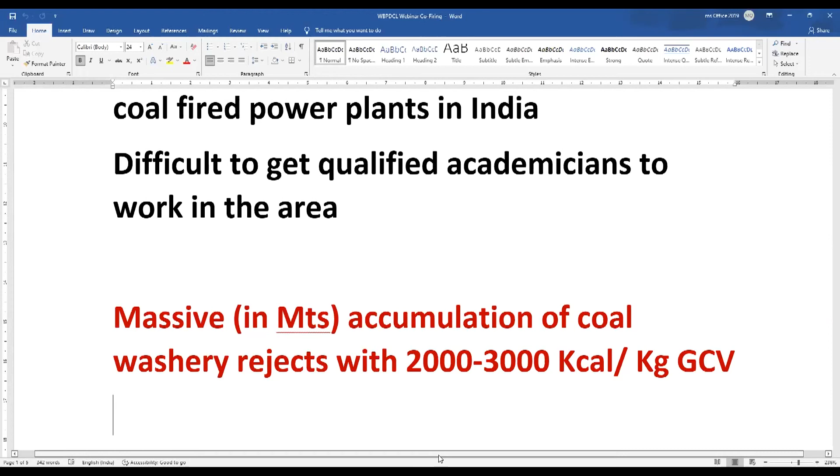What are these rejects? These are 2000 to 3000 kilocalorie per kg GCV - 2000 is not very far from the actual run-of-mine coal being charged. Rapidly growing geopolitics on emission made India a target, India and China. And parallelly, Europe, since the beginning of the millennium, became very serious in commercial application of biomass-derived energy.

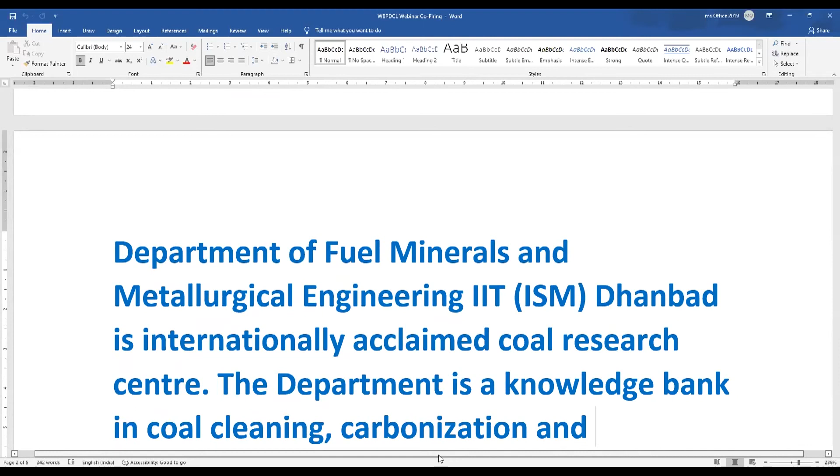Our department is internationally acclaimed as a coal research center in India, and is a knowledge bank in coal cleaning, carbonization, and combustion. There is hardly any operator in the coal sector for whom we did not work - government agencies, public sector, private sector. For nearly 5 decades, we offered the only MTech program in fuel engineering in India.

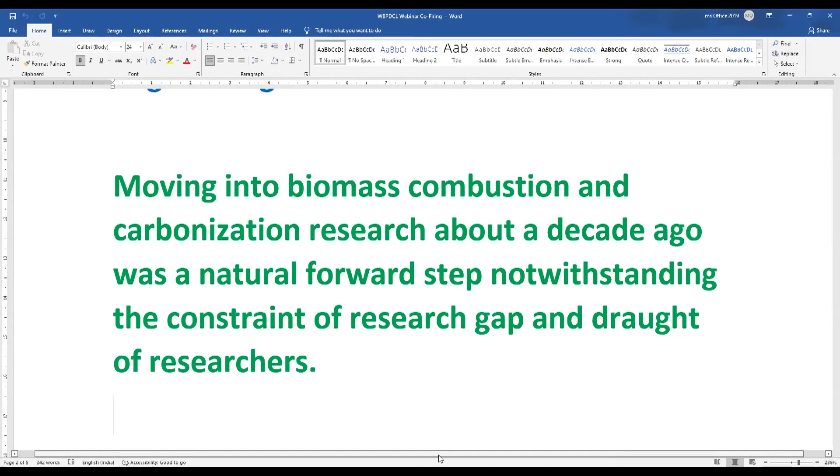So moving into biomass combustion and carbonization research about a decade ago was kind of a natural forward step, notwithstanding the constraint of research gap and drought of researchers. Very difficult to get people, even now, to work in this area. People have been working for the last 3 decades on carbon sequestration, with no visible immediate effect, whereas burning issues of coal combustion in India - many such issues remain, many such questions remain unsolved. And yet you don't get good people. Very difficult.

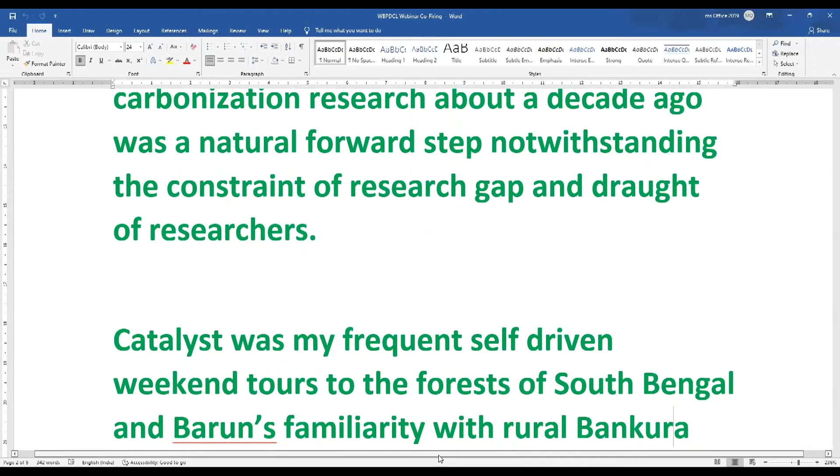But we had doubts about the supply chain of biomass - what biomass, what will be the supply chain? The catalyst was my frequent self-driven weekend tours to the forests of South Bengal, and Barun's familiarity with rural Bankura district, also of South Bengal.

What we found was that hundreds and hundreds of tons of fallen sal leaves are lying in the forest, at least twice in a prolonged season each year. And these fallen sal leaves remain in the forest with a powerful tendency towards spontaneous combustion, quite commonly causing forest fire, and they remain even after the local villagers have collected truckloads of sal leaves for their domestic cooking.

And throughout the whole year, they use the sal leaves for their entire domestic cooking. Even many roadside eateries in this forest and adjoining areas of Jharkhand, West Bengal, Odisha, and Chhattisgarh use these fallen sal leaves.

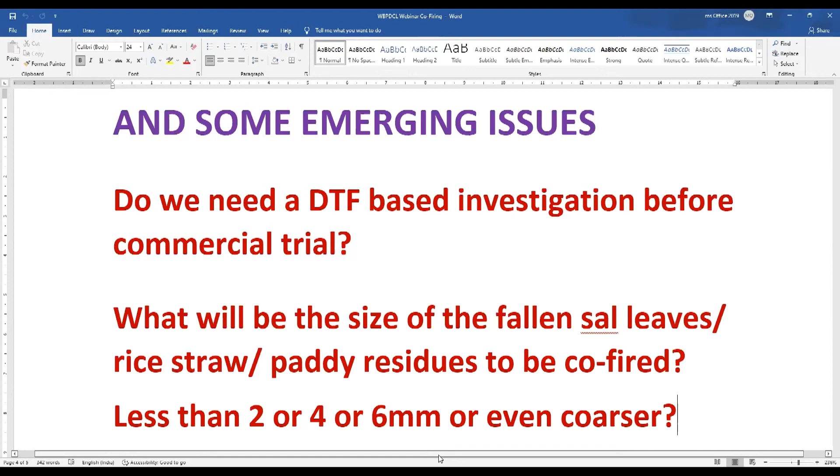Does it need to be pelletized or agglomerated? If it is less than 2, 4 or 6 millimeters in size, the smaller the size, the better the economy. How would that size be achieved? Shredding, crushing, pulverizing, or a combination of these?

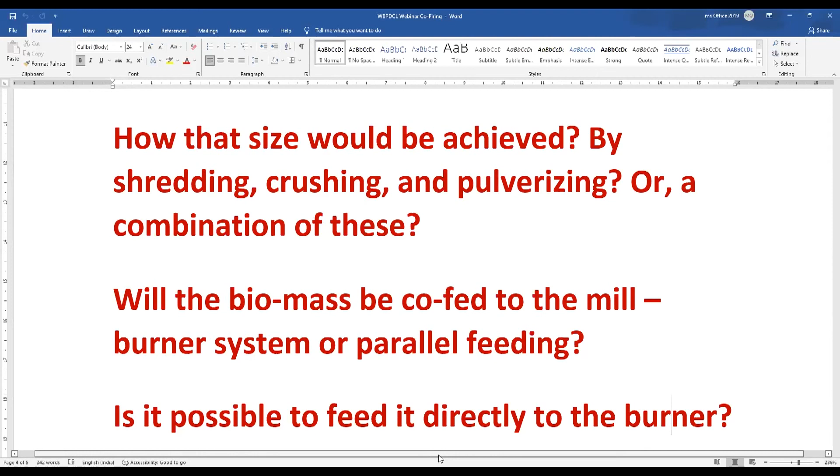Will such biomass, not wooden pellets, be co-fed to the mill burners? A 2 millimeter shredded leaves, or even 6 millimeter, may be difficult to feed along with coal by open conveyor belt up to the mill burner feeding point. Is it possible to feed it directly to the burner? Is biomass agglomeration essential for feeding purposes? If you agglomerate, you raise the cost. Alternately, can the biomass be a source of auxiliary fuel support, as a kind of import substitute?

So these are the thoughts I felt I should share with this forum, because you are the real plant operators, and as I understood from today's deliberations, this will soon be done throughout the whole country. So to summarize, wooden pellet is good, it is already proven, but we should also think about how to make the best utilization of local biomass resources, which are specific from region to region of India, India being such a vast country. Sal leaves are a classical example of that. Thank you.